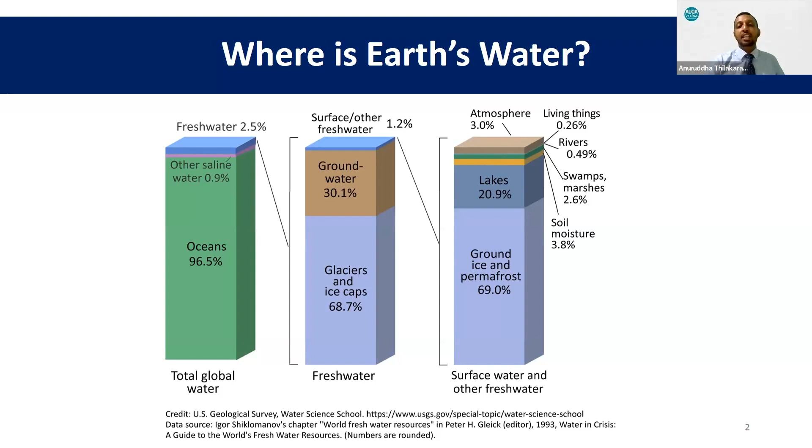We can go further into the breakdown of the surface water. From this figure we can see how fresh water, this scarce resource, is not evenly distributed - there is a high temporal and spatial variation in the distribution of water. Some countries have plenty of water, while other countries don't have enough even to fulfill their basic needs. That's why drinking water treatment is a much important aspect when we consider this scarcity of drinking water.

So what are the water sources available? We have groundwater sources - mainly we are taking groundwater from dug wells and tube wells. We have surface water - rivers, tanks, and ponds are the surface water reservoirs. Then we have seawater or saline water, and glaciers.

For water treatment methods, there are many available - conventional and advanced methods like DAF, ion exchange, and RO filtration, among others. But when selecting the suitable method for drinking water treatment, we should consider the raw water quality and the required water quality, because we have to select our treatment method to suit our raw water quality, and it should be able to deliver the required water quality.

Then again, another important factor is operation and maintenance. We can build a very big, sophisticated water treatment plant, but if the local people or users don't know how to operate or maintain this treatment plant, it will be a failure. So we have to consider that factor.

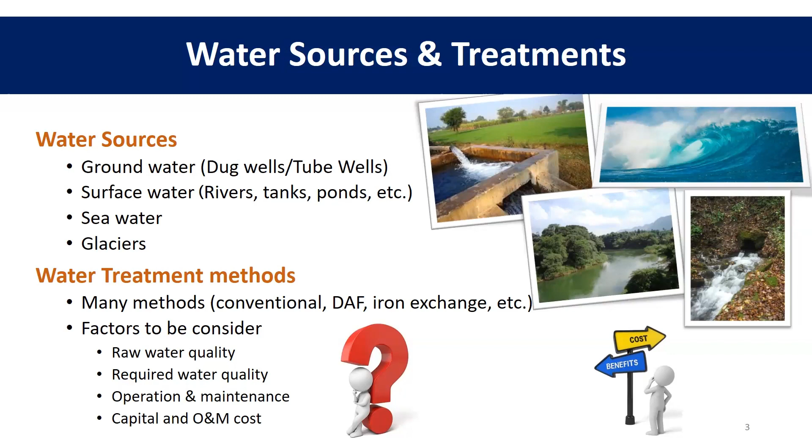So, I would like to briefly give you an idea about the historical development of water treatment. The first origins of drinking water treatment go back to 4,000 BC. Sanskrit and Greek writings recommend to boil water on fire, heat it in the sun, or dip in a heated iron. So basically they recommended to heat water before consuming. There is evidence around 1500 BC that in Egypt they used the chemical alum to settle the suspended particles. That is the same thing we are doing in our conventional treatment. Later, the father of medicine, Hippocrates, invented something called the Hippocrates sleeve, a cloth bag to strain rainwater. That's another treatment method, and he recommended to boil the water.

In the third century BC, public water supply schemes were developed in Rome, Greece, Egypt, and many of the large civilizations during that time. From 340 BC to 225 AD, during the Roman Empire, they were a very advanced civilization. They built the aqueduct system to transport drinking water to their people in the cities. This aqueduct system had the capacity to deliver about 5 lakh cubic meters per day to Rome. This is a very marvelous engineering example. After the fall of the Roman Empire, during the dark ages, water treatment was not developed; they paid not much attention to water treatment.

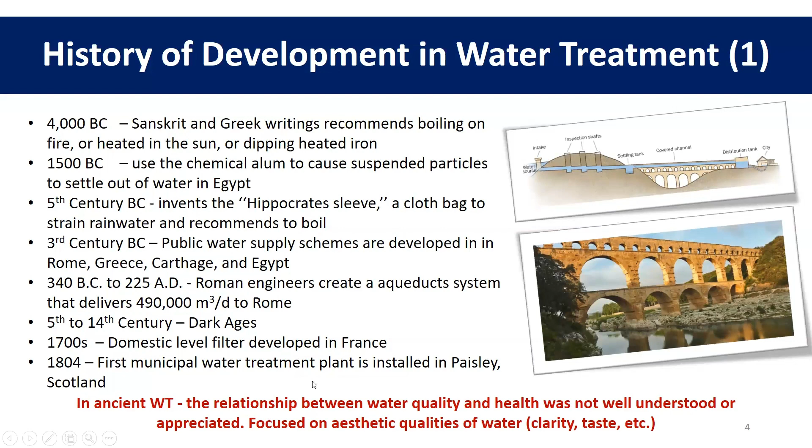That's somewhat similar to the current activated carbon filters. So we also had some development in water treatment. However, in these ancient or old water treatment systems, they did not understand the relationship between the quality of the water and health concerns. They may have only appreciated the taste, odor, etc.

However, in the 19th century, Dr. Snow traced the origin of the cholera disease back to a water source in London. Then scientists were interested in this new finding and started research, and they found the microorganisms and pathogens that live in drinking water and cause illnesses like cholera and typhoid. Then water treatment technologies started to develop to address these issues. In the late 1800s and early 1900s, coliform tests used to identify the presence of coliform or fecal contamination in drinking water were developed, and the conventional water treatment process was also developed during that time.

So for the first 100 years from the mid 1800s, water professionals and supply engineers mainly focused on preventing waterborne disease outbreaks like cholera and typhoid. But in the 1970s, concerns shifted from acute illness to chronic health disease. Anthropogenic chemicals, heavy metals, and disinfection byproducts were found to be causing chronic health effects. So water treatment interest turned to how to tackle these issues since the 1970s.

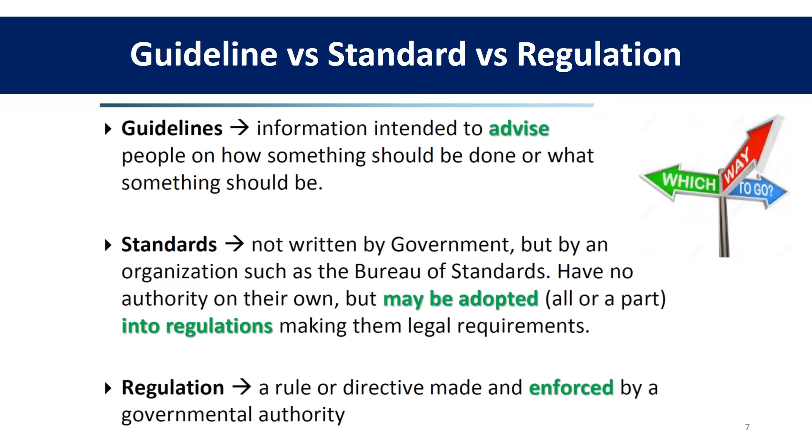A guideline is basically advice. A standard is something like from a bureau. When this is enforced by government, it becomes a regulation. I hope you are clear about the difference between the guideline, standard, and regulation.

Then I would like to move on to the objectives of drinking water treatment. The prime goal of drinking water treatment is to protect human health by removing pathogens, chemical contaminants, and radioactive substances. Then its objective is to improve the aesthetic aspects of water, like color and shade, to make the water accepted by consumers.

Then there are other factors like operational and economic concerns. That means the water shall be non-corrosive and shall not cause incrustation of the pipeline, stains on clothes, or affect the safety of equipment. These are some of the operational and economic concerns in drinking water treatment, and one of the objectives is to address these issues.

Apart from removing pollutants or impurities from the water, there is another important aspect of the objective of drinking water treatment. You know that fluoride is required for your dental health, and oxygen. Likewise, sometimes the objective is shifted from removing to rather adding essential elements to the drinking water.

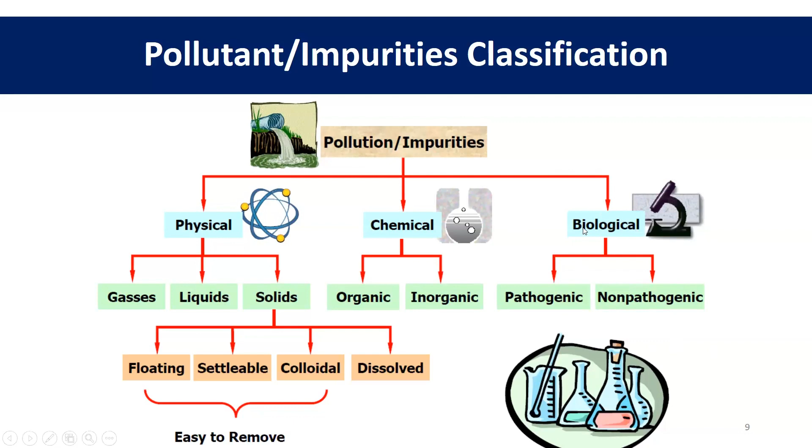But in chemical pollutants, we can identify which pollutants cause risk to human health, and we can remove them. But when we consider biological contaminants, it is not possible to identify the pathogenic and non-pathogenic microorganisms. So mainly what we are doing is removing all the microorganisms in drinking water treatment. So based on this background knowledge, I would like to move on to the conventional water treatment method, the most widely used water treatment method.

Then I will explain each of the unit processes involved in the conventional water treatment method briefly. So first of all, I would like to introduce the conventional water treatment method. It was developed in the early 1900s. This treatment method consists of many unit treatment processes. Like here you can see, the first is screening. Then we have pH correction, maybe oxidation and disinfection.

Some of these unit processes may not be available in each conventional water treatment plant. There may be some modifications. However, the oxidant and disinfection addition are available in some conventional water treatment plants. Then we have a main treatment method called coagulation, followed by flocculation. I'll explain these processes. Then we have sedimentation, and after sedimentation, granular filtration. Sometimes we add filter aid before the granular filtration.

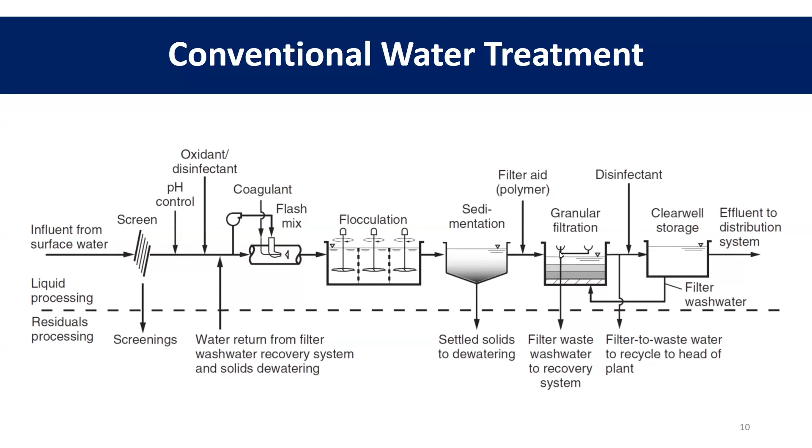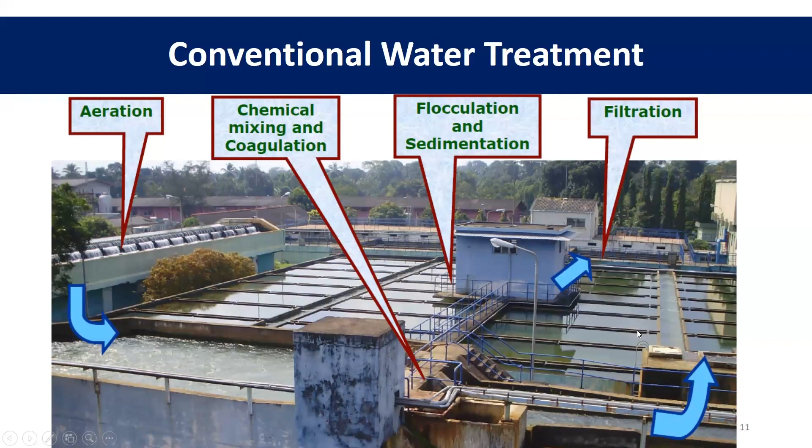So this is a photograph of a water treatment plant. You can see here the aeration basin, and here we have the chemical mixing and the coagulant adding. This is a hydraulic mixer. I'll explain later what hydraulic and mechanical mixers are. Then here takes place the flocculation and the sedimentation. So now we will discuss each unit process briefly and the mechanisms and principles involved.

So first, I discuss screening. As the name states, screening removes from the water large floating objects like logs, fish, plastic, debris, dead animals. The main objective of screening is to remove those from the raw water. So why do we do this process? Mainly to protect our structures and equipment downstream in the treatment plant.

There are mainly two types of screens: coarse screens and fine screens. The coarse screen opening size varies from 32 to 100 millimeters. Fine screen opening size varies from 1.5 millimeters to 13 millimeters. We can classify screens by the cleaning method also: manually cleaned screens and automatically cleaned screens. Manually cleaned means we collect the debris stagnating in front of the screen by hand. Otherwise, we remove it by mechanical means and clean it using water.

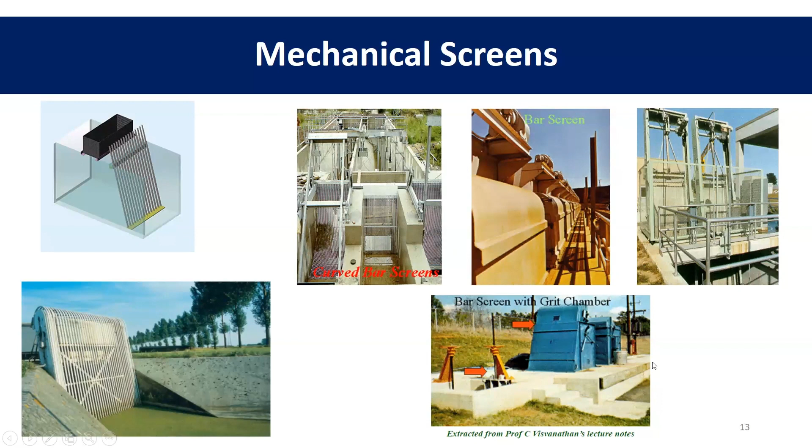So after this screening process, there is a process called aeration. There are two activities that take place during aeration. One is bringing water in contact with air, then gas transfer takes place, that is, transferring gas into or out of the water. So we use aeration to add essential gases to the treatment process, adding oxygen, and removing toxic gases from the water like hydrogen sulfide, methane, ammonia, and some volatile organic compounds during aeration.

So there are many types of aeration. Here we have cascade type aerators. Basically what we are doing is increasing the surface area in contact with the air for efficient gas transfer in the aerator. And this is another type of aerator, the spray aerator. The same principle takes place here. We spray water into the air to increase the surface area in contact with the air.

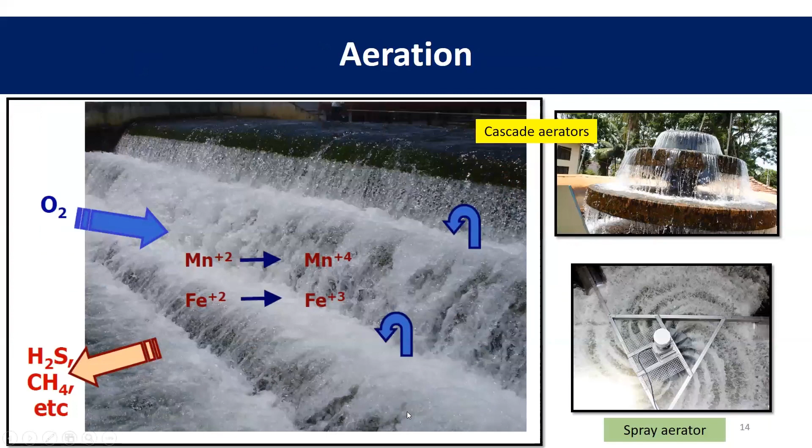Can I have a minute, please? Excuse me, one of my colleagues called and mentioned that it's still not clear. Give me one minute, I will wear my headset. Can you hear me clearly now? I think you can continue, Engineer Anuruddha. Engineer Anuruddha, we can't hear you. Yes, we can hear you. Okay, I think my headphone is not working, so I'll switch back to the computer microphone. Sorry for the disturbances. I'll continue with my presentation.

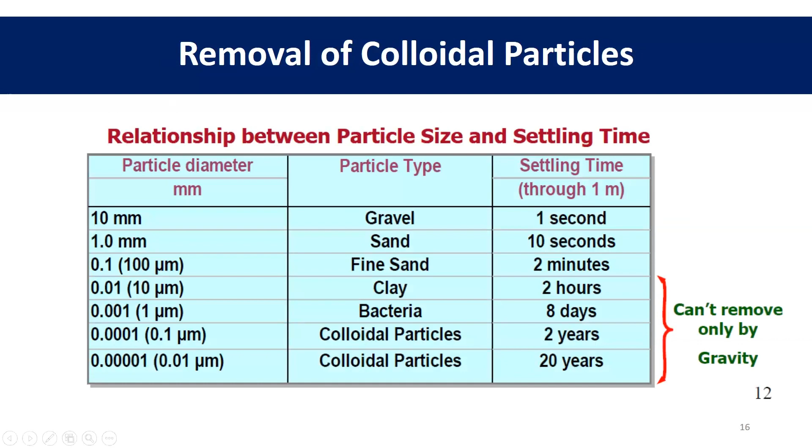So before going into the detail of the solution, I would like to do a brief introduction to these colloidal particles, whose size starts from 0.1 micrometer or below. So how do these colloidal particles form? Mainly there are two methods. One is by synthesis, that is, the insoluble inorganic matters formed during chemical reactions may produce stable colloidal particles. Another method of forming those is the size reduction of matter due to the grinding of coarse materials. When coarse materials grind with each other, they form fine materials, so that can become colloidal particles.

Then material with high molecular mass or long polymer chains can be insoluble in water, so that can form a colloidal particle. For example, products of humus form colloidal particles in this way. In natural phenomena like erosion of rocks, weathering of rocks forms colloidal particles.

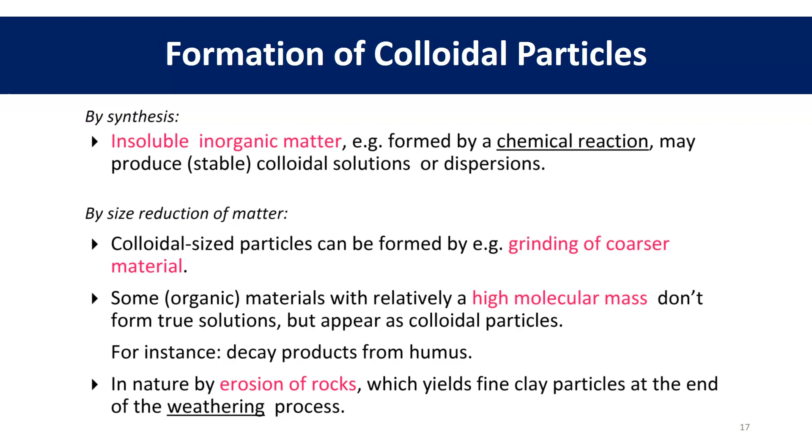So how is the behavior of these colloidal particles? Colloidal particles are electrically charged. When the colloidal particles are in the water, some of the elements attached to their crystal lattice may dissolve in the water. Then it will create an electrical charge void. Because of that, the solid particles are electrically charged.

Then, what happens in the water? There are many ions, positive and negative. Because of this charge in the colloidal particle, let's say, as an example, if you consider this colloidal particle charged with a negative electrical charge, all the positive electrical charges in the water are attracted and adsorbed on its surface. After adsorbing these positive charges, a weak diffuse layer is formed adjacent to this adsorbed layer. We call this adsorbed layer the Stern layer and the other layer the diffuse layer.

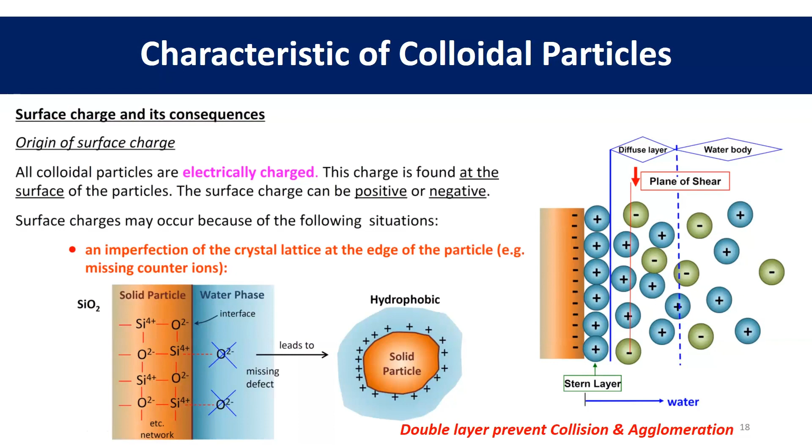Then there is a potential barrier or electrical charge barrier developed next to these colloidal particles. We call these layers double layers, and these double layers prevent collision and agglomeration of the colloidal particles to form much larger particles.

So the solution is coagulation. We call it coagulation and flocculation. What do we mean by coagulation and flocculation? I'll explain it later. We use coagulation and flocculation to remove suspended and colloidal particles, basically to remove the turbidity from the water. And while we are doing that, a portion of some dissolved matters like phosphorus, natural organic matter, fluoride, and heavy metals are also removed during these two processes. Because of that, we call coagulation and flocculation a multi-purpose technique.

The most common coagulants used by today's drinking water treatment are ferric sulfate or copper-ash, and aluminium sulfate, called alum. In Sri Lanka, we mainly use alum because we don't have many iron processing factories. Some countries have steel making factories, so they use copper-ash or ferric sulfate, but in countries like us, we mainly use aluminium sulfate. Some water treatment plants use polyelectrolytes as coagulants, but it is not very common or popular in the world.

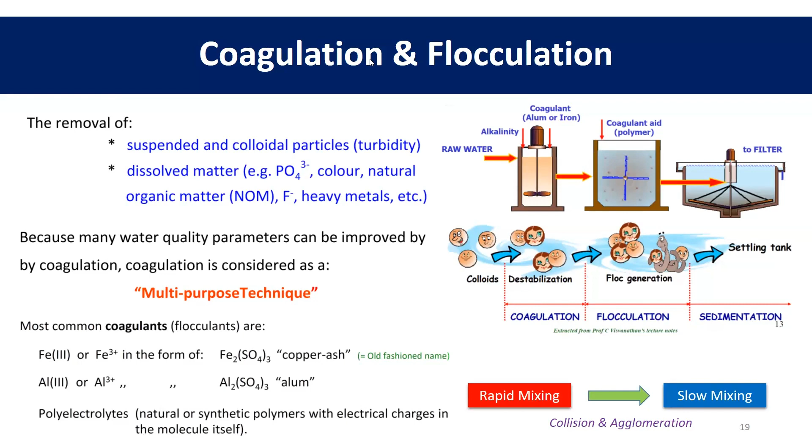So these are some of the coagulation and flocculation instruments we use. This is the mechanical type coagulator, the popular vertical mechanical type coagulator, used to mix the coagulant with the water rapidly. This is the horizontal type coagulator, and there are hydraulic coagulators also.

Hydraulic. Now, when we are adding the coagulant, we need high turbulence. We can cause this turbulence by mechanical means or by creating hydraulic jumps. Some treatment plants use the hydraulic jump, others use mechanical instruments for this rapid mixing.

Then after that, we slowly mix the water. For that there are mechanical mixers or something like a baffle flocculation basin - this is a hydraulic flocculator.

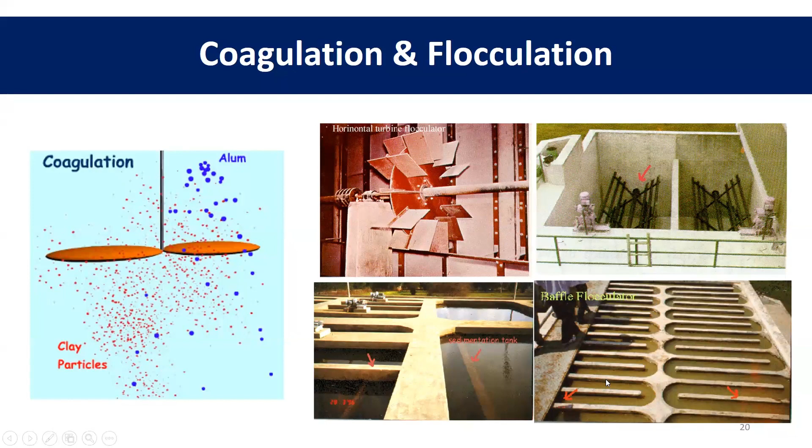So how does this destabilization of the colloidal particle take place? I will briefly explain these mechanisms, and these theorems go very deep, so I'll just give a brief introduction. First, when we add iron salt or aluminium sulfate to the water, it starts to form complexes in the water.

Then adsorptive coagulation means the colloidal particles are adsorbed to these complexes. Then there's another method called precipitation or sweep coagulation, where the growing flocs capture the colloidal particles into their flocs. We call this sweep or precipitation coagulation.

Then another method we call interparticle bridging, where very long polymer or polyelectrolyte chains help bridge two colloidal particles to each other. These are some of the mechanisms and theory behind this. If you want to understand more, you have to spend more time on this topic - I will just briefly explain these things, but the theorem and principles behind it go deep.

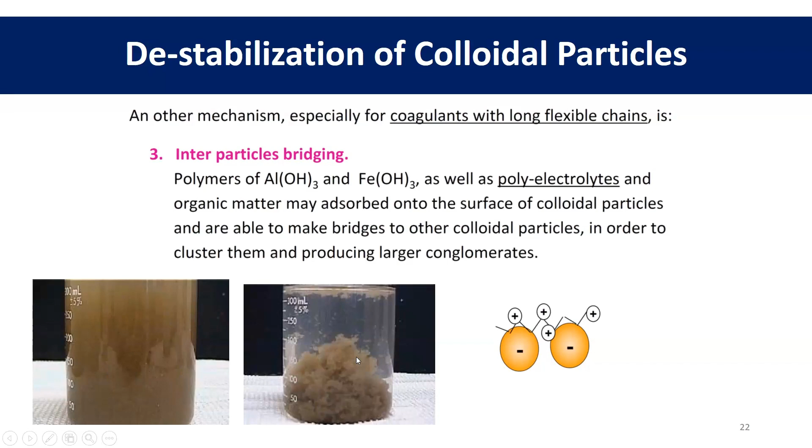How we give the energy is by providing kinetic energy - that's what we call mixing. Mixing is the way of giving kinetic energy to the water. After sufficient kinetic energy, particles collide with each other and make large particles.

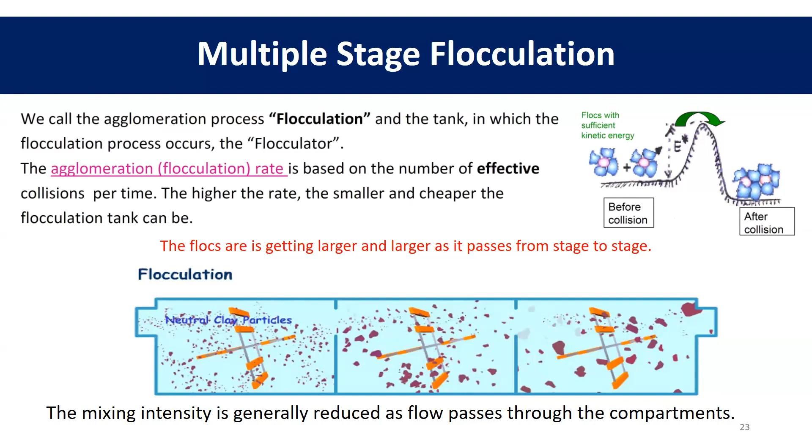However, when the particles become larger and larger, there is a tendency for them to break apart again if mixed with high energy. So normally what we do is create a velocity gradient throughout the flocculation basin. When the particles are small, we give high energy, but as the particles become larger step by step, we reduce the energy.

So that's what I would explain about flocculation. Then I would like to move on to sedimentation.

Sedimentation can be explained from the structure, but I don't want too much detail on that. However, you all remember Stokes' law from A-level physics. If you take this kind of particle, there are two forces acting upon it initially: the force due to gravity and the force due to buoyancy. Normally the gravitational force is larger than the buoyancy force, so the particle starts to move downward.

When the particle is moving downwards through the liquid or water, due to the viscosity of the liquid, drag forces start to form. This drag force is proportionate to the velocity of the particle's moving velocity.

At some point all the forces become equal, then the velocity is not increasing further. We call that velocity the settling velocity. This is the settling velocity derived using Stokes law.

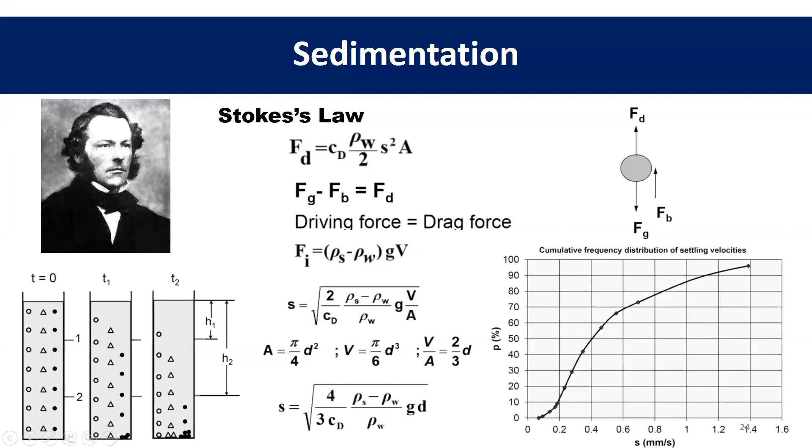So I need to explain how these particles are settling in the settling basin using this horizontal flow sedimentation tank. If you take these particles with, as we discussed, a settling velocity of 0.6 millimeters per second, and design this settling basin to settle these particles, the pathway of these particles in the settling basin is like this - it goes diagonally.

When the particles come to the end of the settling basin, they travel from top to bottom. If a particle has a larger settling velocity, it will be settled somewhere here. But if a particle has less settling velocity, it may escape from the settling basin.

So this is basically how particles are settled in the settling basin, and there is a parameter or criteria called overflow rate. That is something similar to the settling velocity. We can calculate it by dividing flow rate by the cross-sectional area.

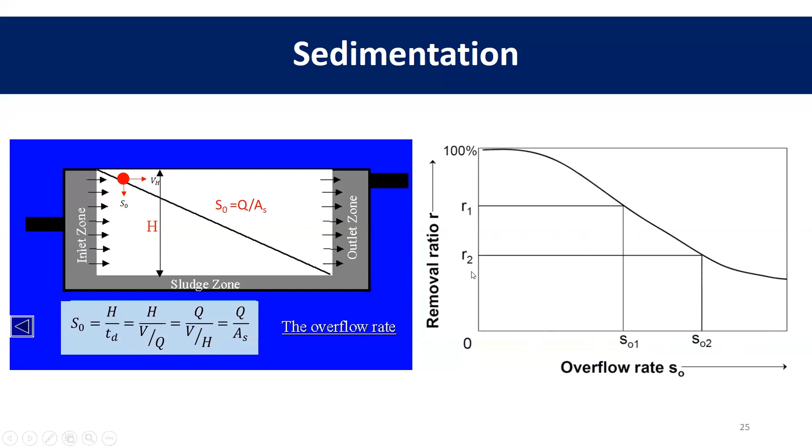Sedimentation basins can be classified based on direction of flow, shape, mode of operation, and sludge removal methods. All settling basins have a sludge removal mechanism. For some sedimentation basins, the settled sludge is drawn from the system and treated separately - the main treatment method is drying under the sun.

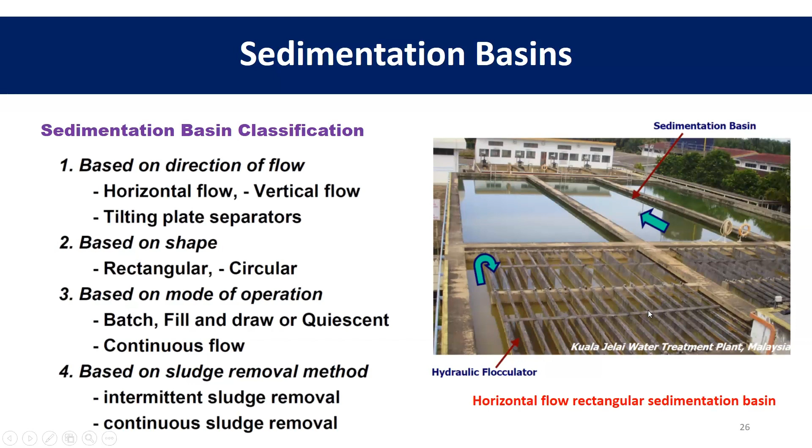Sedimentation basins can be classified based on the sludge removal method, like intermittent sludge removal or continuous sludge removal. This shows a horizontal flow sedimentation basin with hydraulic flocculator.

There is another type of sedimentation basin, the vertical flow circular sedimentation basin. We call these clarifiers. The shape of the sedimentation basin is circular, and the flow direction is vertically upward, with water supplied from here. This is the collection trough.

There are some special kinds of sedimentation basins with lamella plate settlers, which increase the surface area and can increase the efficiency of the sedimentation basin. If you have limited space, it's better to go for the sedimentation basin with lamella plates.

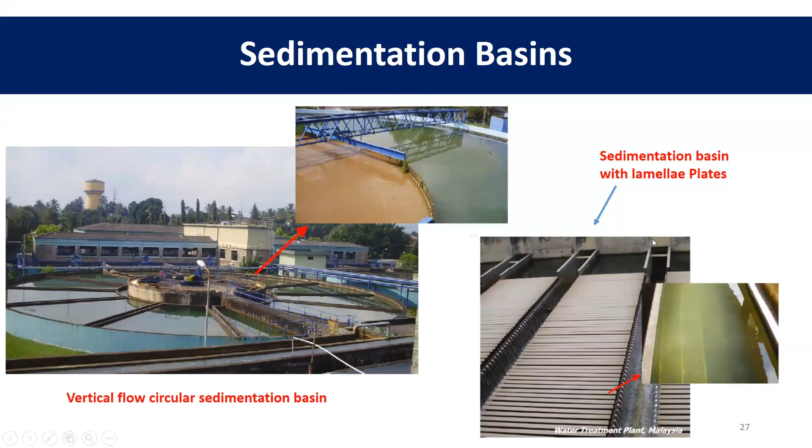After sedimentation, the next process is rapid sand filtration in conventional water treatment. The mechanism for removal of particles or solids in rapid sand filters has three main methods: one is straining, the second is adsorption onto the surface of particles, and the other is absorption into the sand particles. All three removal processes take place in a rapid sand filter.

Based on the flow rates or flow control, we can classify filters into two categories: constant rate or declining rate filters. I'll explain this a little bit.

With the clogging taking place in the sand filters, the head loss in the filter is increasing. So if you want to filter water at the same rate, we have to overcome this additional head formed due to the blocking or clogging in the filter.

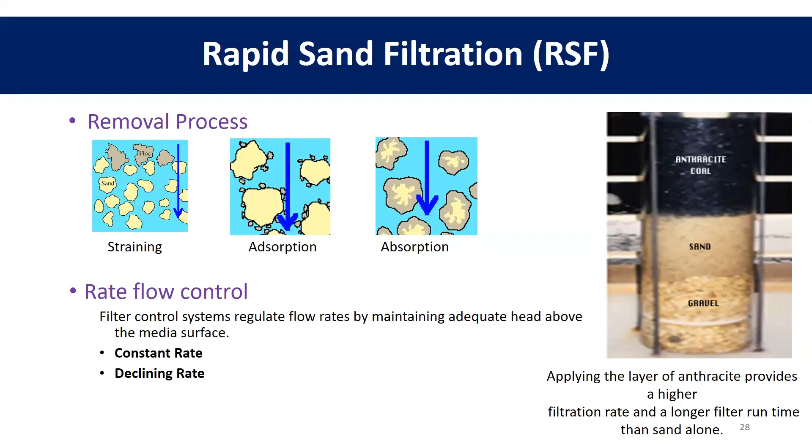Meanwhile, if this treatment or these filters are not properly designed, you may face operational problems too. So this is a general arrangement with a sand filter.

So you have a supporting gravel layer and filter media, and under this supporting gravel layer we have the under-drain to let the filtered water through, and this filtered water is directed to the water tank. Then there is a facility for the backwash.

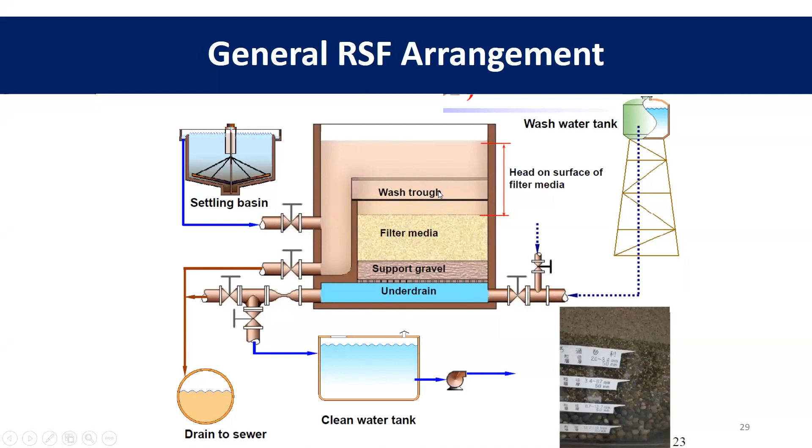We pressurize water into this under-drain system, then the water flows back through the filter, collecting the wastewater and removing it from the filter after the backwashing. So this is the general arrangement of a rapid sand filter.

These are the typical parameters related to rapid sand filters. The filter media diameter or effective size ranges from 0.5 to 2 millimeters, and the filter media is normally placed in a vessel or tank. The bed depth of the filters may vary from 0.5 to 2 meters. The general filtration rate varies from 5 to 15 meters per hour.

We get the depth of the supernatant to about 0.3 to 1.5 meters. Suspended and colloidal particles are partially removed, which helps lower the turbidity in the filters. The filter gets clogged because of these removed particles, and then after clogging, we have to backwash the filter. That is the normal situation of a rapid sand filter.

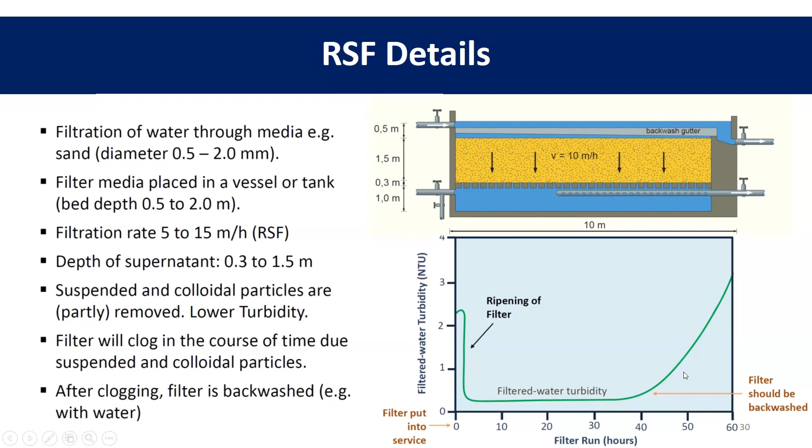So, filter backwashing — this is the typical sequence. Normally we close the inlet, allow the remaining water to filter through, and carry out air scouring.

Then we add pressurized water, meaning the air blower and the single pump are both running. Then we stop the air blower and run the pumps until the filter is cleaned up.

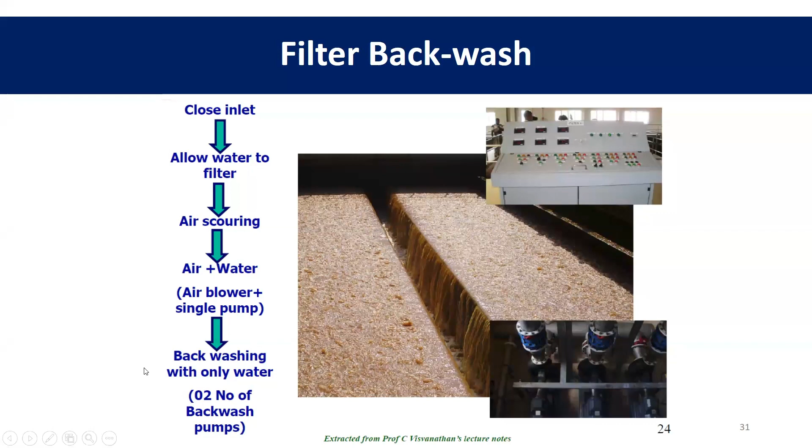The final process I'm going to discuss about conventional treatment is disinfection. The intended purpose of disinfection is to remove pathogens and kill microorganisms in the drinking water. So this removal of pathogens does not only take place during disinfection — please keep that in mind.

Most of the pathogens and microorganisms are removed in the upstream processes like coagulation, sedimentation, and rapid sand filtration, which help remove these pathogens from water. However, the remaining pathogens are removed by this disinfection process.

So the mechanism of disinfection: what we are doing is we destruct the cell structures of the microorganism during the disinfection process, and sometimes we interfere with the metabolic activities of the microorganism and protein synthesis in the disinfection process. So mainly we use chlorine as the disinfectant. In Sri Lanka, we have basically used chlorine. I'll explain later about other disinfectants used worldwide.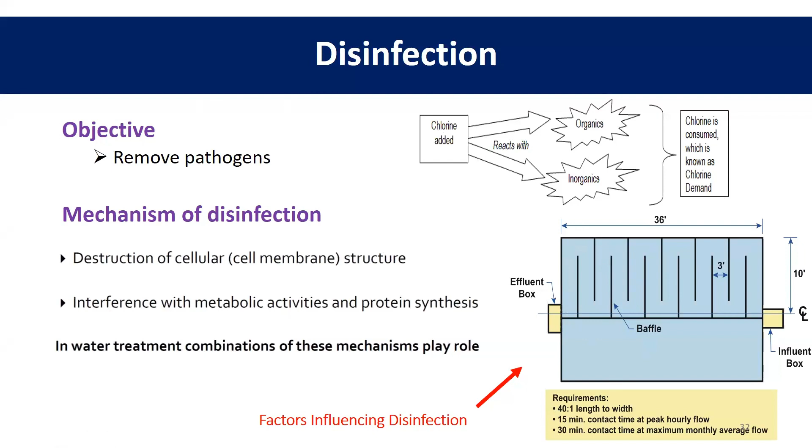These are the basic and rough introduction. If you want to learn about the disinfection process, there are many things we can discuss. However, I'm not going to discuss much due to the limited time available. So the desired properties of a disinfectant chemical, these are the desired properties. It should be quick and effective killing.

It should be able to quickly and effectively kill the pathogens, and it should be readily soluble, provide residuals, and it should not give taste, odor or color to the water. It should be non-toxic to human and animal life, and it should be easily measurable in the water, safe to handle, easy to apply and control, and readily available at a reasonable cost. These are the desired properties of a disinfection chemical. However, we may not be able to find a chemical with all these desired properties.

However, the most widely used disinfectant in the world is chlorine. Chlorine has most of these properties. However, the use of chlorine in the world or developed countries is now getting reduced. Why is that? It is the risk of forming disinfection byproducts. However, WHO advised disinfection should not be compromised by attempting to control disinfection byproducts. That is, the disinfection byproducts cause chronic illnesses, but the pathogens cause immediate illnesses. So they recommend not to compromise the disinfection to avoid these illnesses.

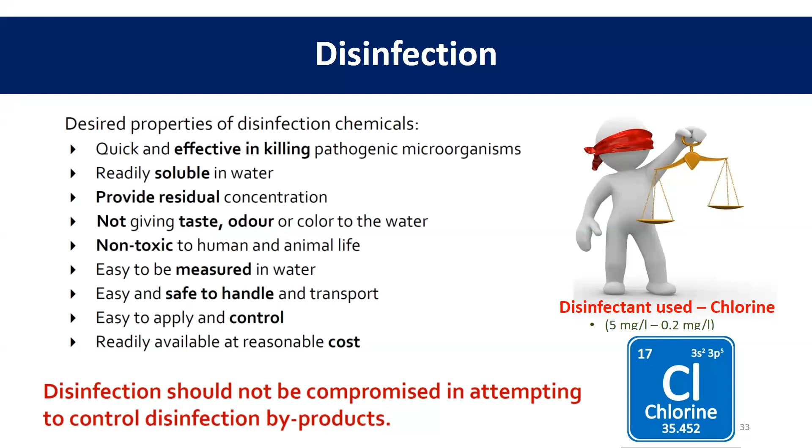And this is how chlorine is available in the market. This is gas chlorine. We are using gas chlorine. Sometimes we are using bleaching powder, calcium hypochlorite, and sometimes we are using sodium hypochlorite also as a disinfectant in our water treatment plants.

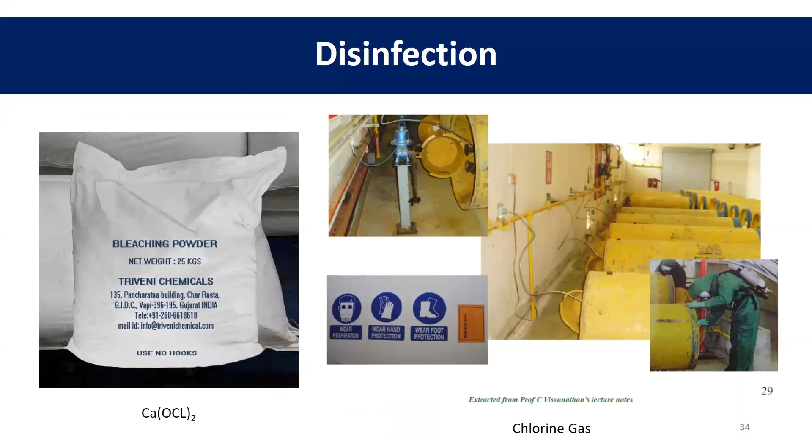So with that, I would like to conclude my presentation. Before concluding, I would like to add some concluding remarks. Conventional water treatment is the most common and widely used water treatment method in the world, and in Sri Lanka also. Many combinations of these unit processes I have discussed are used in water treatment plants. A particular water treatment plant has a different combination compared with another water treatment plant.

Also, conventional treatment can be modified using advanced disinfection types like UV disinfection or ozone disinfection, or an activated carbon filter, or a biological filter. Likewise, there is flexibility in conventional water treatment to your requirement. However, it requires deep understanding for optimizing and designing these processes. During this presentation I just gave a brief introduction and did not go too deep into these processes. But you need a very good deep understanding if you want to design and optimize these unit processes.

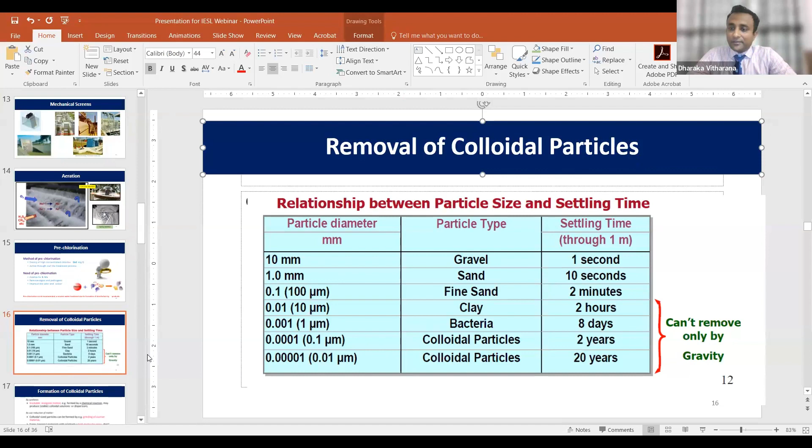Thank you, Anuruddha. And before that, I can see here our water treatment specialist, Mr. Ratnayaka, the water board water treatment specialist, also joined. Not questions from the specialist, but we expect certain opinions. Mr. Ratnayaka, can you speak a few words? Okay.

Thank you very much, Dharaka, for giving me an opportunity to give my ideas here. I am sorry, in the middle I could not listen. I was looking at the presentation slides, but I could not listen. But at the beginning and at the end, I could pay my attention to that.

Anyway, I am really happy to see at least a few engineers are concentrating on this subject, because earlier we did not have many engineers who were really interested in water treatment. Though they did their designs, the required dedication was for other subjects. But here, Anuruddha is trying to improve the knowledge level in the water board, and therefore I am really happy to see that.

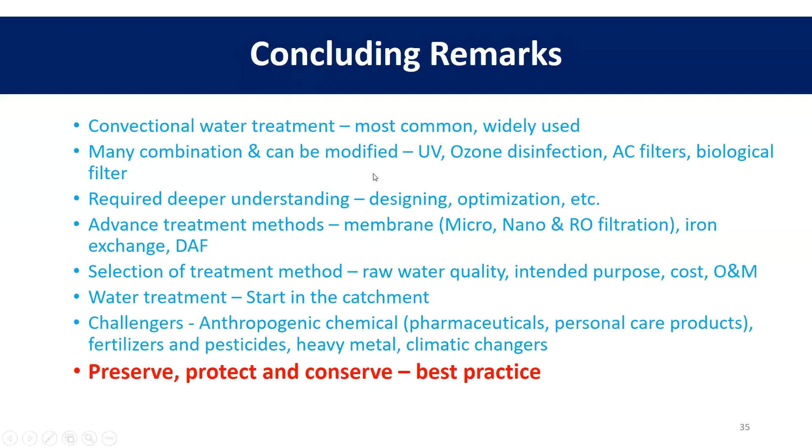Shall I ask one question, Mr. Anuruddha? Fernando here. Sure. Actually, about the screening area, coarse screen and fine screen. Can you explain a little bit the fine screen? You mentioned the size 1.5 to 13 millimeters, and coarse screen 32 to 100. If we take a river intake, we are going to use a manual screen, not mechanical, not a band screen. In that case, just an idea about the fine screen sizing.

Okay. What is your water source? Actually, the source is a river intake. In the local area, in some seasons floods come. It's already there, but there are some problems. The thing with water treatment is we cannot recommend a value that is suitable for everywhere. So first we have to study the quality of your raw water. Every water source is different from another, that's why we have a range and not a specific value for the opening. So you study your water quality, then find the best suitable opening size.